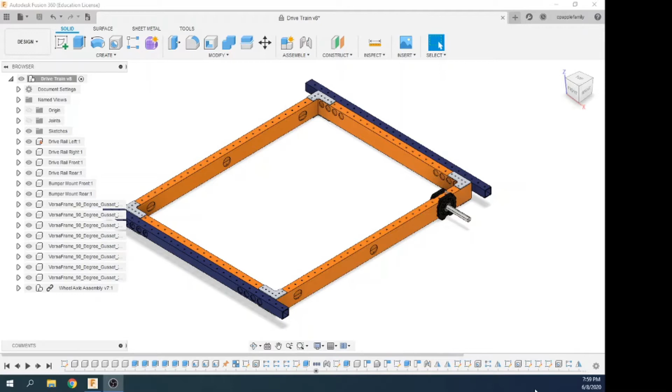This week we are going to prepare to add other purchased components as assemblies. We have created a library of assemblies that we can use year after year to speed up the process, but today I'm going to show you how to build this wheel assembly. I'm going to start a new design.

Before we can import purchased components that we've downloaded from various websites, we have to save our design. I'm going to name this file Example Axle Assembly. Now that we have our design saved, we're going to sketch some reference geometry we can use to build our bearing blocks around. I'm going to select Create New Sketch.

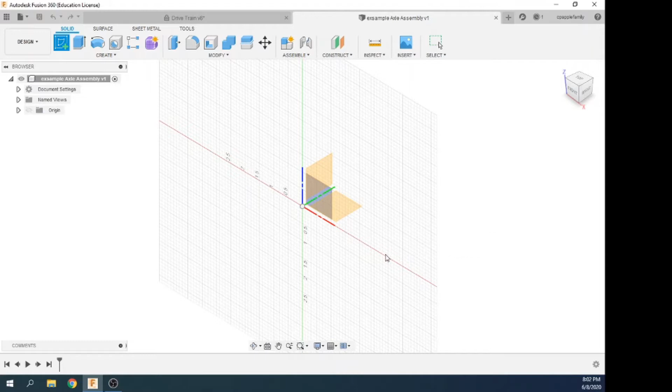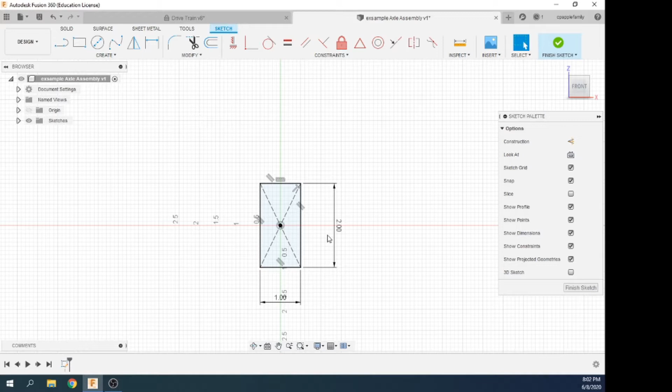To keep the same orientation in this assembly as it would have been on a robot, I'm going to select the front plane. I'm going to draw the outer profile of the tubing using the center rectangle, starting at the origin, 2 inches tall, 1 inch wide. You can see the sketch is fully constrained, depicted by the dark black lines.

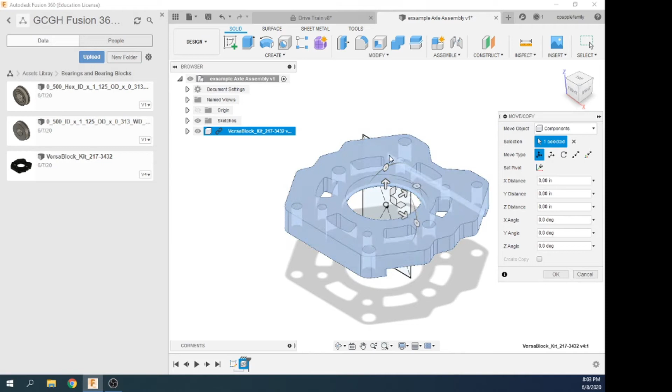Finished sketch. I can now import one of the first components using our bearings and bearing blocks folder, dragging in a VersaBlock. Using the grips, I can start to orient the block as it would be assembled. Since this is one of the outer axle wheels, I'm going to have the V down to raise the axle up the 1/16 of an inch. Just drag it slightly off and place the component.

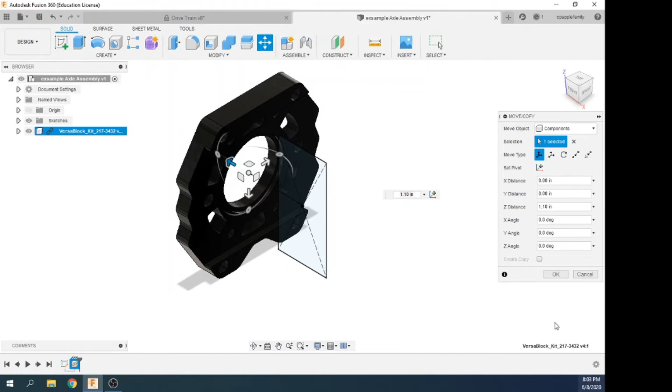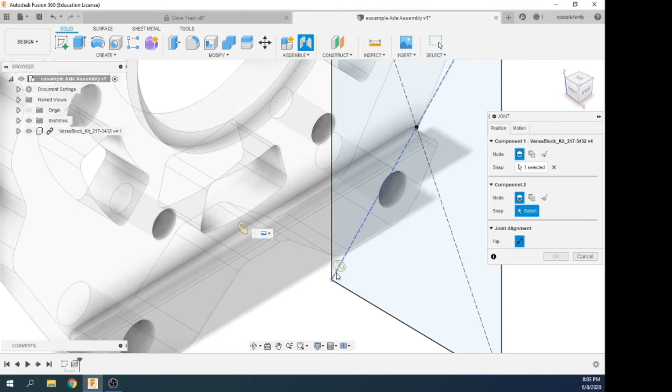I'm going to join this block, making sure I'm selecting the rigid joint. The first position is going to be snapping to the midpoint of this corner line. To get the right point on here, I can snap the perspective of the drawing straight on, grab this lower corner, and you can see the part snaps into place. Okay.

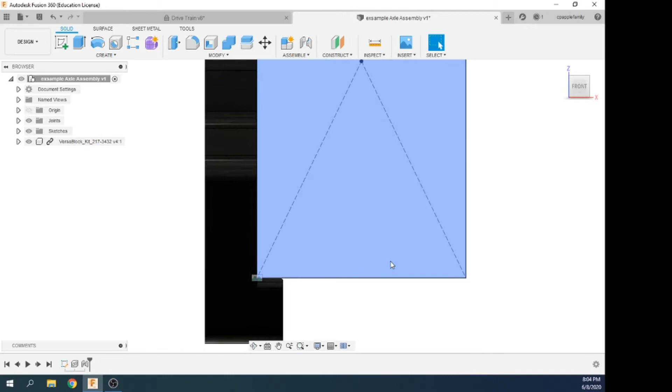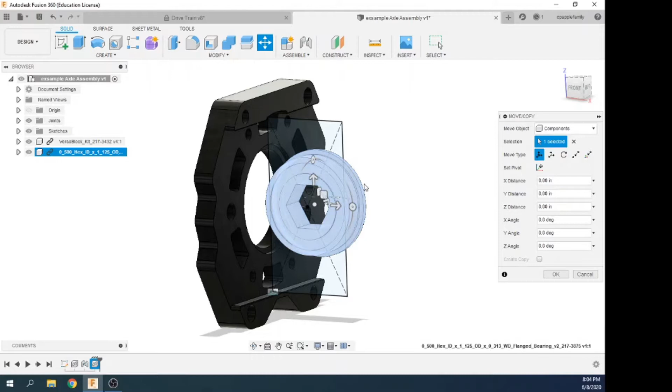The next part I want to drag into our design will be a bearing. I'm going to select the 1/2 inch hex bearing, drag that into our project, so I can get a good view on all the points I need to snap on. I'm going to leave it as it's oriented, as it's brought in. I'm going to apply a joint. I'm going to select the revolute joint for the bearing.

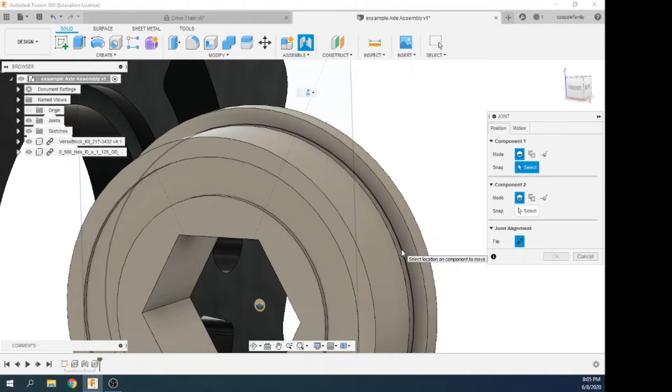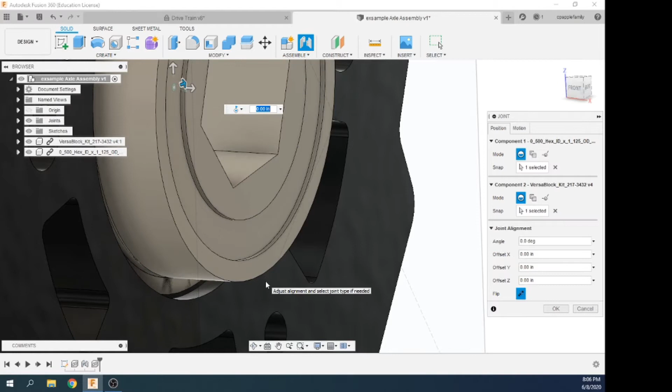The first snap will be the center of this outer edge circle. The second snap will be the inside corner. You can see the bearing is spinning properly, but is inverted. I can select the flip option to flip the bearing and properly orient. This bearing is now joined to the block and spins appropriately.

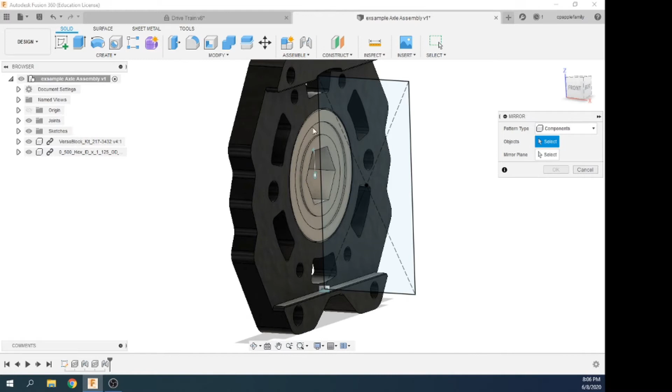I could drag in another block and a bearing and repeat the process, or I could use the mirror command, selecting components to mirror. Objects will be the VersaBlock and bearing. The mirror plane will be the YZ plane. Then OK. What you'll notice when you mirror objects, the joints do not translate to the new parts, so they are free to move.

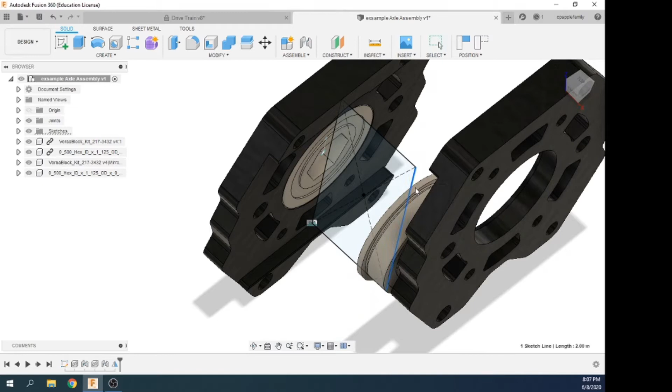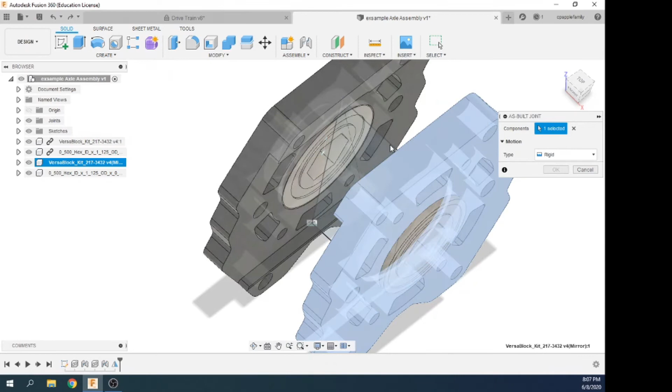Undo, undo. We can use the assemble as-built joint. The first joint I'm going to apply will be a rigid joint to the VersaBlock and to the sketch plane. Okay. Using the same as built joint, I'm going to select the revolute, select the bearing and the bearing block, the position to spin around.

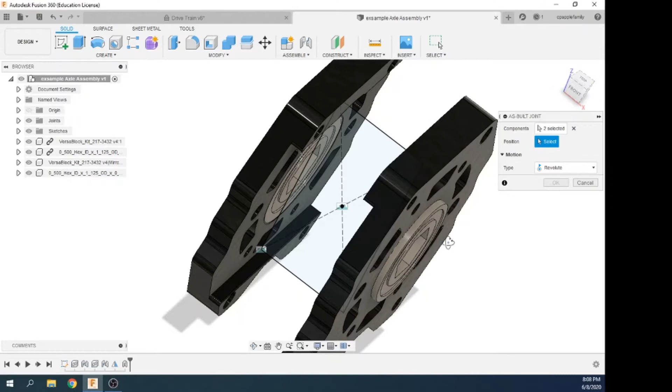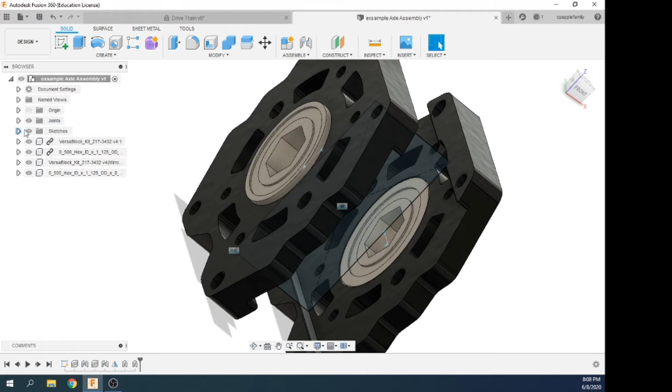Going to try to find a point here in the center of this plane of the circle. You can see the bearing is now revoluting. Okay. We are done with the sketch for now, so I'm going to hide that. We now have our two bearings and bearing blocks. The next thing we're going to add is the axle.

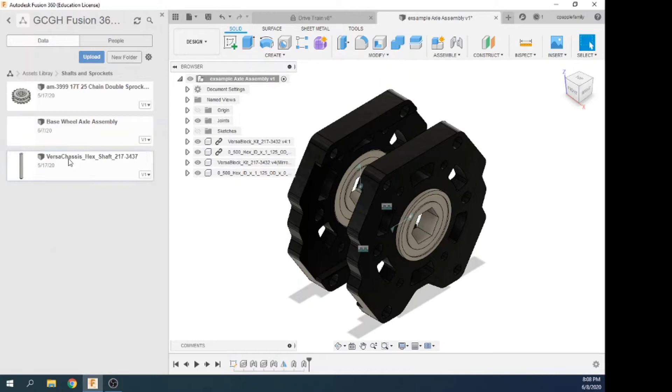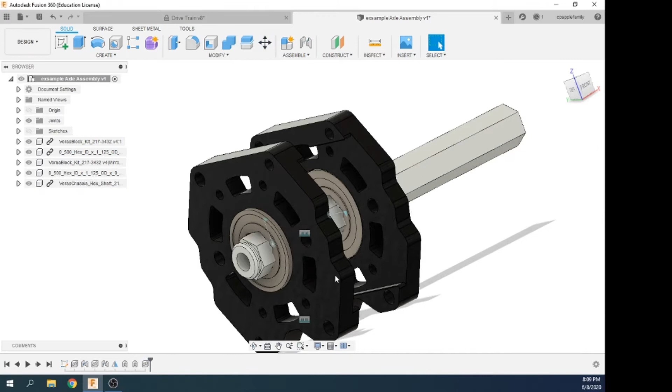In our assets library, we have shafts and sprockets and the Versa hex shaft. Dragging that into the project. Using these controls, I'm going to spin the axle close to where it will end up. Then select OK. We're going to join the axle to this bearing using a rigid joint, motion, rigid.

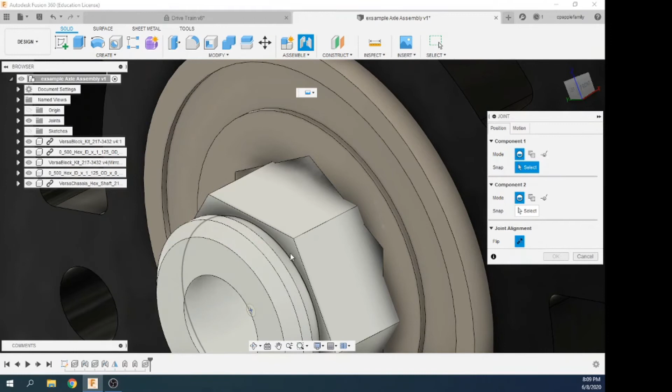The first position is going to be the center of this circle created by this corner, and the center of the circle created by the edge of the bearing. You can see the rigid joint is applied, but the axle is not quite lined up properly. We can use these grips to try to rotate the axle to fit visually, and also we can make note of the 120 degrees that are applied here.

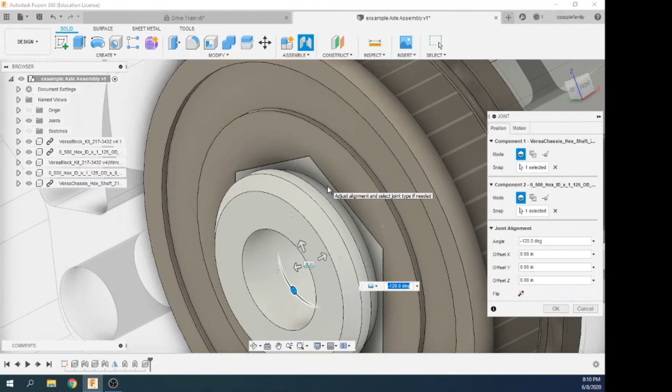Hex bearings use a 60-degree angle from each surface. 120 makes sense. Okay. Now, as the bearing spins, the axle spins, or the axle spins, the bearing spins. The next part we're going to add will be the sprocket.

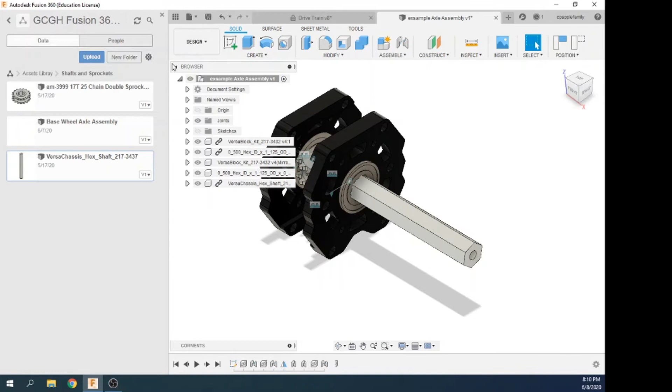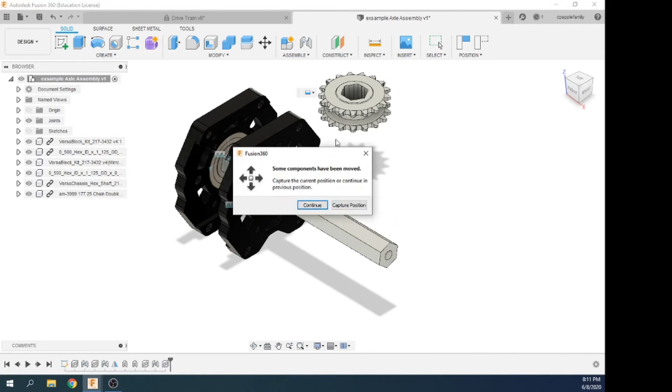I'm going to drag the sprocket out to view. Okay. The joint we're going to apply for the sprocket will be a slider joint. The sprocket, as it's installed on this axle, can shift left to right without any spacers. Assemble, joint. The motion will be a slider.

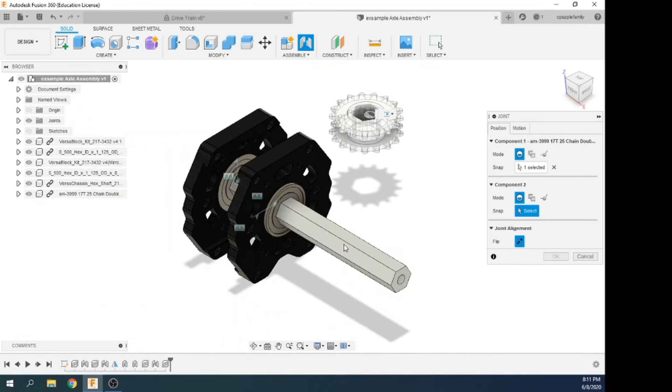The first position selected, we're going to find the inside corner and the point at the midpoint of that segment. Select. We are then going to find a similar corner of the hex shaft, midpoint point. Select. We can observe that the sprocket is traveling in the right direction, just not fastened to the axle properly.

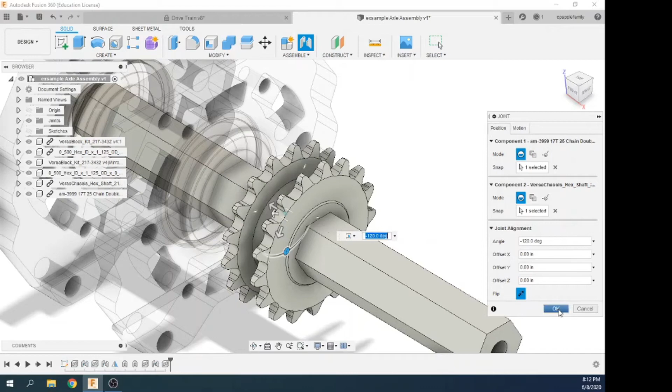Again, we can use these grips to spin the part closer into space, and we observe that same negative 120 degree angle to synchronize the flats of the hex shaft and sprocket. We could grab the sprocket and drag it into place, but we are going to do something a little more exacting. We're going to apply to the joints some limits, but first we need to take a measurement.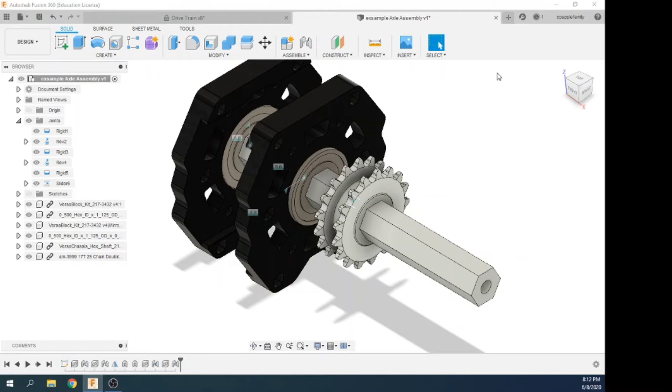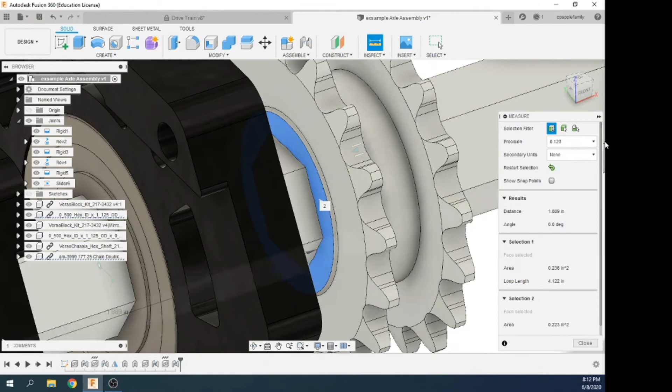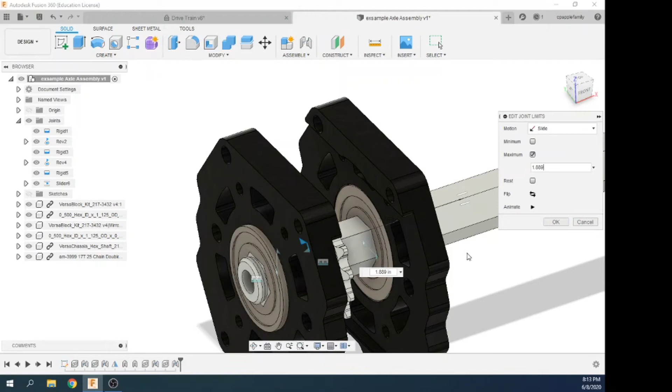I'm going to use the inspect tool to measure from the flat surface of the farthest bearing to the flat surface of this sprocket, making note of the 1.889 inches. Close that. I'm going to select the slider joint that controls the sprocket, edit joint limits. In the maximum, I'm going to type in the 1.889. And we can see the sprocket snaps to flush with the bearing.

We do know that there's a 100 thou tube in here, so I'm going to subtract 0.1 to allow for that spacing of the tubing. Okay. Now when we slide this over, we're only allowed to go as far as that limit and no further. We now need to know how far the sprocket can go in the other direction.

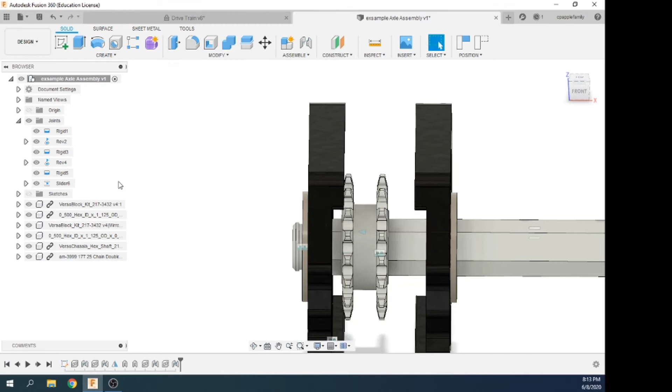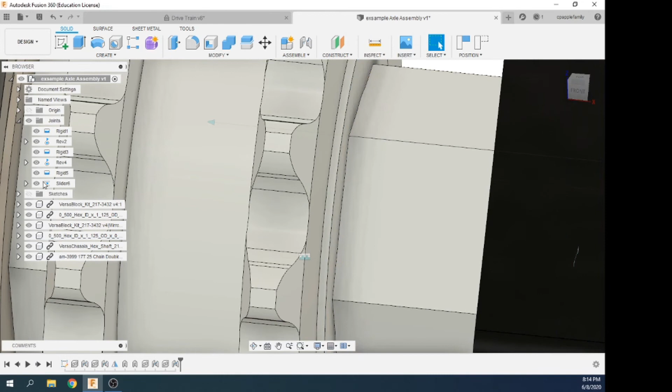Snapping this all the way to the side, I'm going to use the measure tool. Measure from this bearing surface to the sprocket surface and make note of the 0.41 inches. Returning back to the slider joint, edit joint limits. I'm going to enter in a minimum distance, and that's going to be the 1.889 minus the 0.41 that we were left with before.

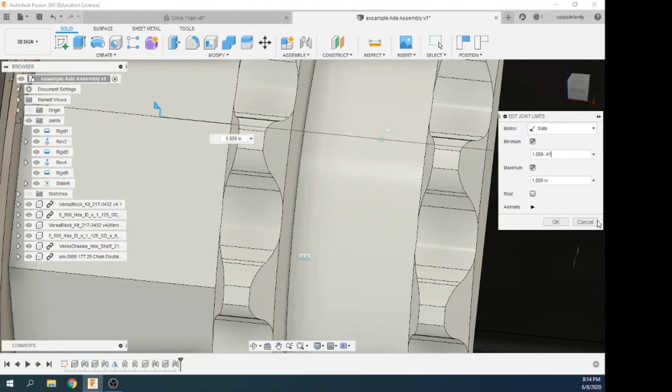Looks like we lost our minus 0.1 for the other way. Okay. The sprocket obeys the max and the min.

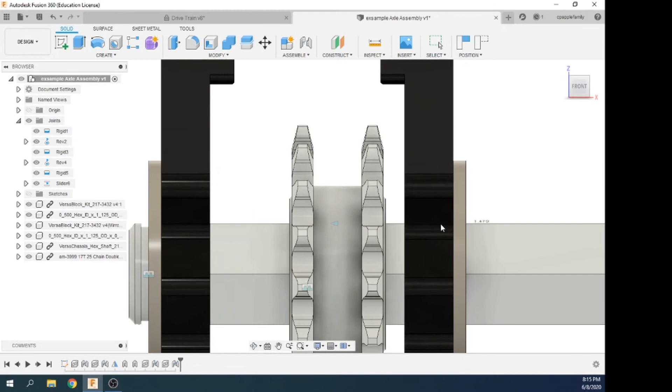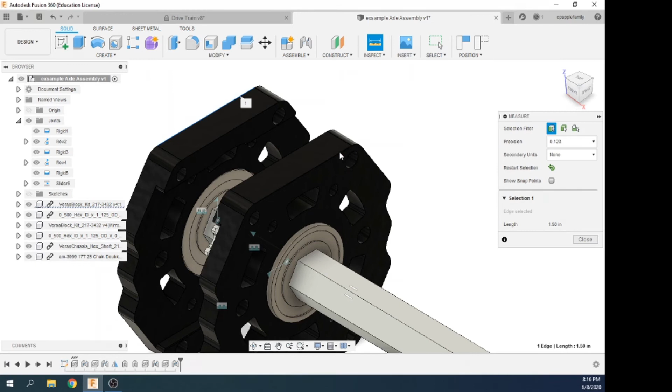Most models we make, we do not include the hardware, but for these Versa blocks, we're going to install the 10-32 button head bolts that complete the clamping action of these blocks. I'm going to show you how to insert items from McMaster-Carr. But first, we need to know how long the 10-32 bolt needs to be. I'm going to use the inspect tool to take a measurement from this edge to the far edge, making note of the 1.5 inch distance. We need a 10-32 bolt that extends that 1.5 inch.

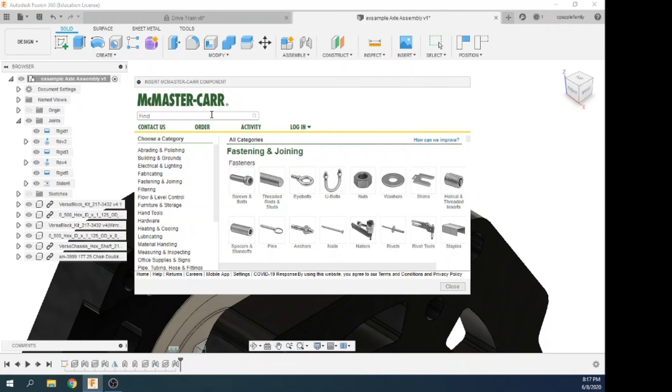So going up to the insert tool, we can insert a McMaster-Carr component. We can search for button head cap screws, stainless steel alloy black. We typically use the black oxide. Scrolling down to the 10-32 section, we can look for the 1.5 inch long partly threaded.

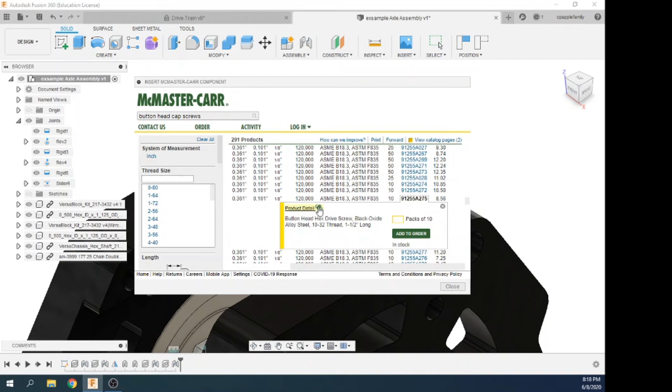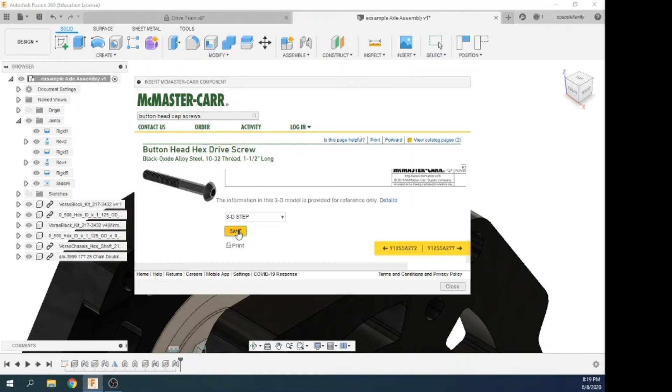Select the item for more details. Look at the product details in CAD. Scrolling down to the bottom, we'll see that there's a download button. After selecting the model format that we want, we can hit save. And the bolt is brought into our project.

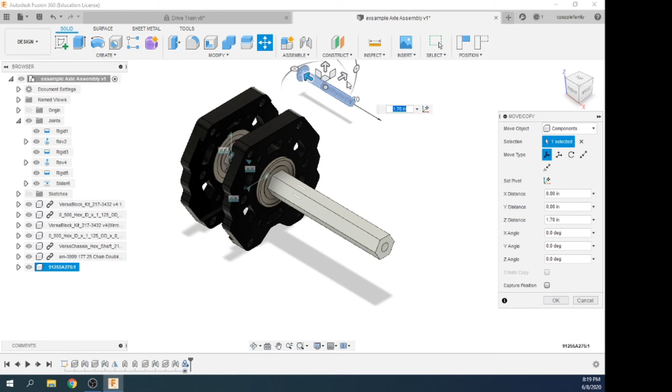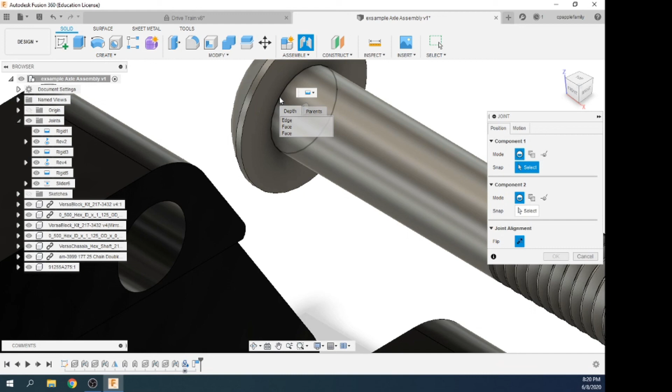Using the same dragging of the tools, dragging of the grips, and rotation, I'm going to get it generally positioned. Selecting OK. I can now add a few joints. Going to select the rigid joint. The first position is going to be the center of the circle created at this transition. The second will be the center of this circle. Select OK.

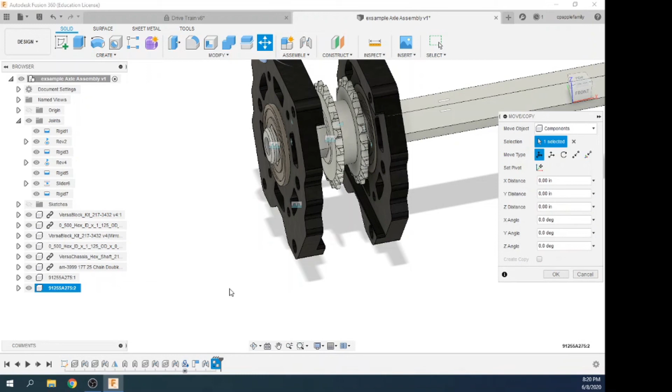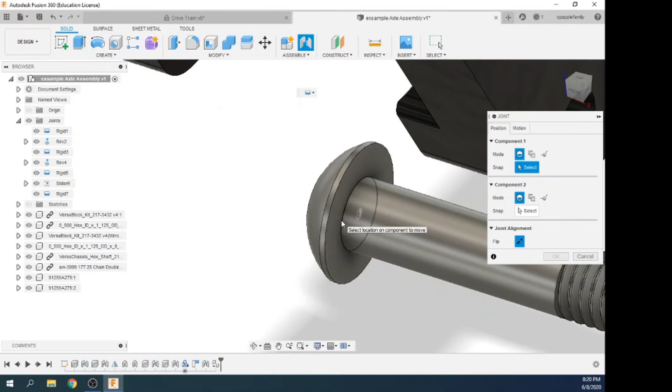I'm going to make a copy using Control-C and Control-V to paste a copy of that bolt. Drag it where I can see it. Apply a joint, the rigid joint. The first snap will be the center of the circle. Snap to the center of the bolt hole. Okay.

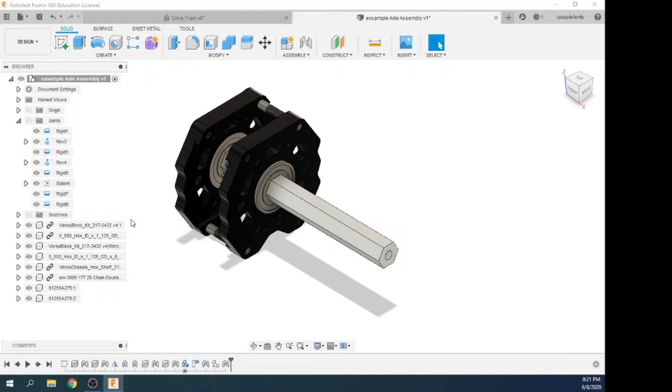Shut off the joints to clean things up, and we now have a model of our axle with a floating sprocket that will stay inside the tube and rotate with everything else. We can now save and use this model in future chassis designs.

In the next video, we'll import this assembly into our chassis model, and we'll explore a few problems we'll have to go back and fix when we grounded our chassis, and see why grounding may not be the right answer when building sub-assemblies that will be assembled later on as larger assemblies.